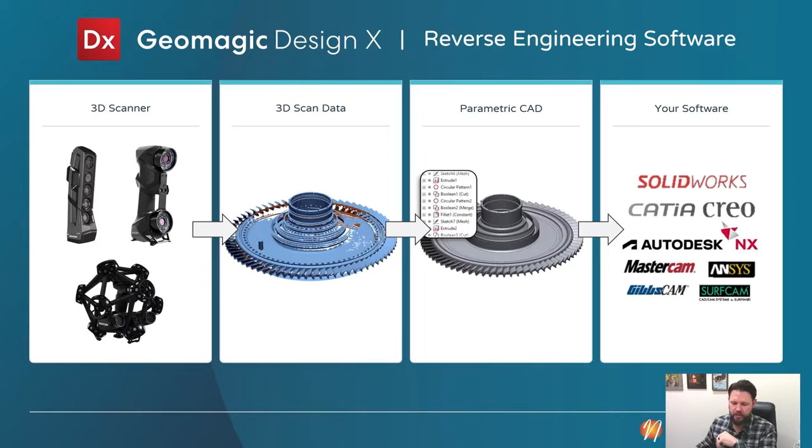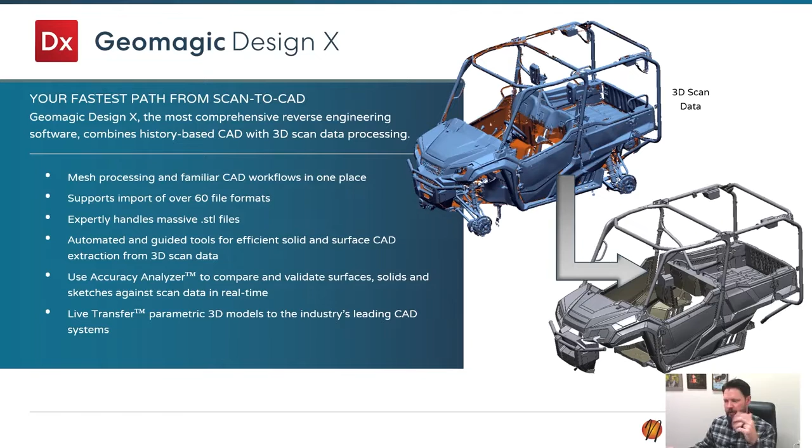A few other nice points about Design X. So we've got automated and guided tool sets, which you'll see here in a video in just a moment. At any point along the way, we can check our CAD accuracy to our scan with the accuracy analyzer, so you can make sure that your CAD file is going to be as accurate as possible. And then once you're all wrapped up, we can do the live transfer tree to your favorite CAD program. Let's say you're using SolidWorks or something like that.

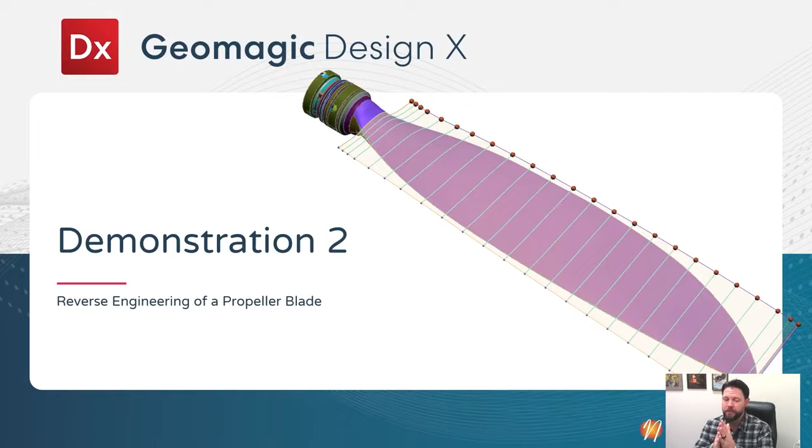So for the second video presentation, this one's a little longer, but it shows a lot of the different tools that I use on a daily basis that are my favorites, and the reason that Design X really pulls ahead of everyone. All right, so as we launch this here, make sure this is going. There we go. Okay. So the way that Design X works is it breaks the mesh into these regions here with the auto segment tool.

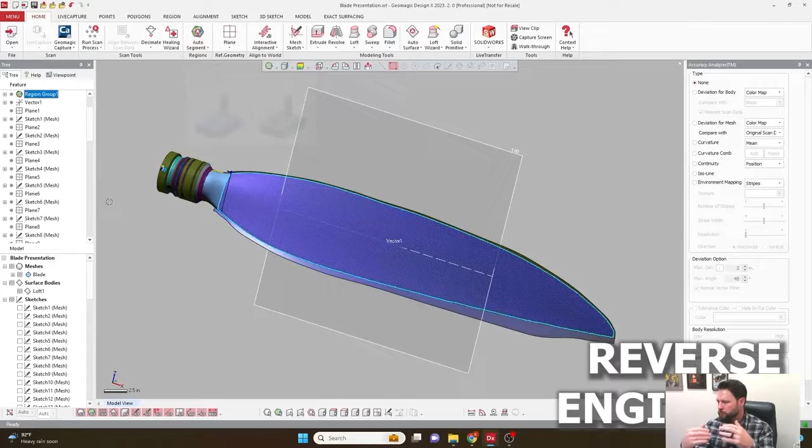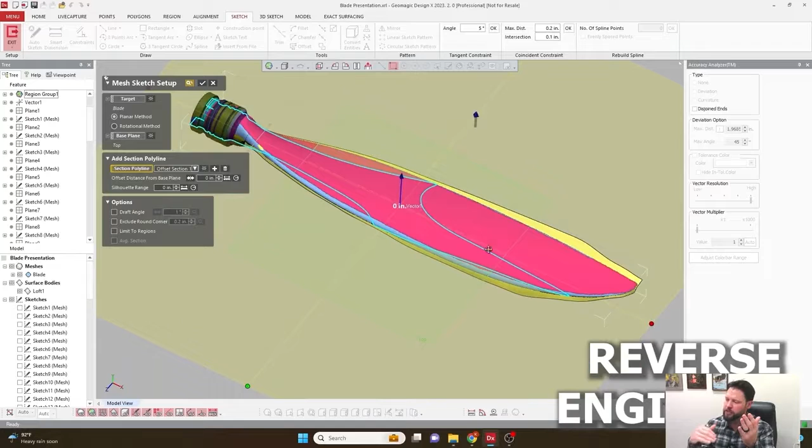And these regions are essentially areas on the mesh that the software recognizes as common geometry. So we've got freeforms, we've got cylinders, planes. Now it's not geometry, it's just areas on the mesh that the software recognizes. Those let us do our automated solutions. Behind those automated solutions is this very basic tool, the mesh sketch. Now I say basic, but it's very powerful because it allows you to create a sketch and cut a cross section to trace for each sketch that you do.

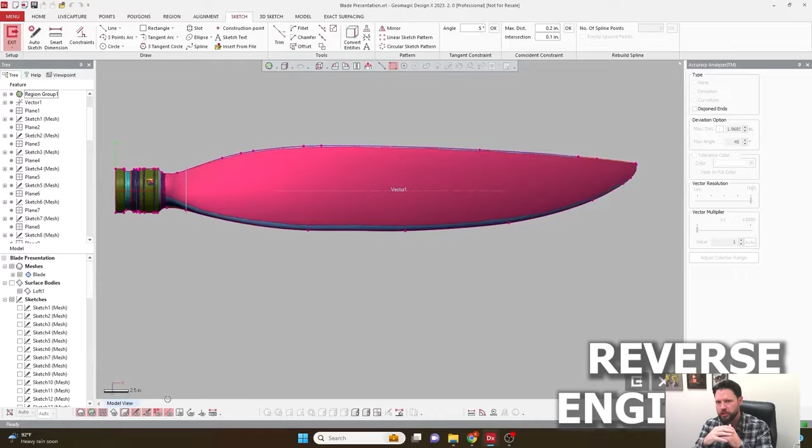Because we can't get a 2D cross section on this 3D profile blade, and I want to get the full profile, I can expand what's called a silhouette range, which is fairly unique for Geomagic. And what that does is it projects the whole profile of that blade to my sketch plane. Now what we're looking at here is basically a 2D version of those 3D regions that you saw, all the different colors, and it segments this cross section up into what it thinks are common areas. And what you can utilize that for is putting geometry on those areas.

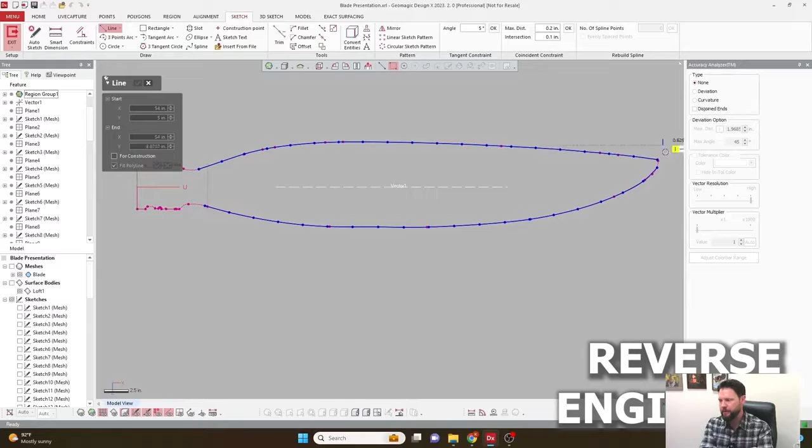So here what I've done is I've laid an actual spline across that because it's more of a spline function there. I've laid a spline across that whole line, and at that point it's going to convert it to real geometry. So we can utilize any of our general sketch tools if we want to in here. We can trim up this whole area because I want a full bounded area. Because what I'm looking for is a solid body that I could extrude that is the exact outer profile of that blade. All right, so we can pull these nodes along that.

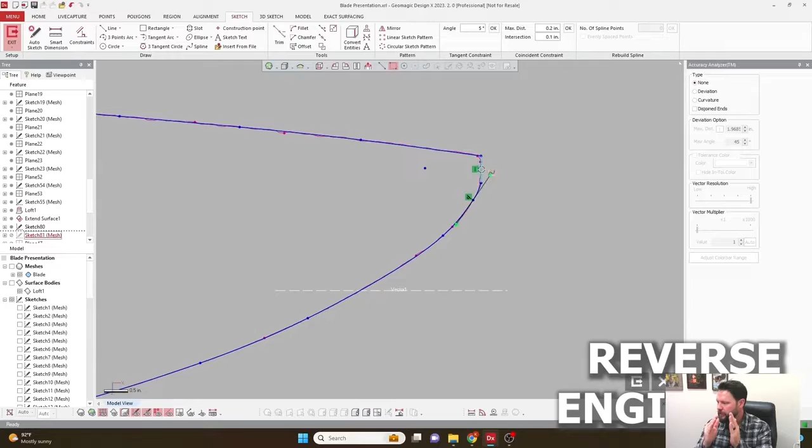You see everything snaps to that reference polyline, so we can snap everything up to it and make sure we're all nice and accurate. Make everything tangent, and that way we have a really nice blade profile.

So what I'm going to do is take that sketch, which at this point is just a regular sketch, just like you would do in any other program. We're going to extrude that one way and then the other, and you can see there we get our solid body.

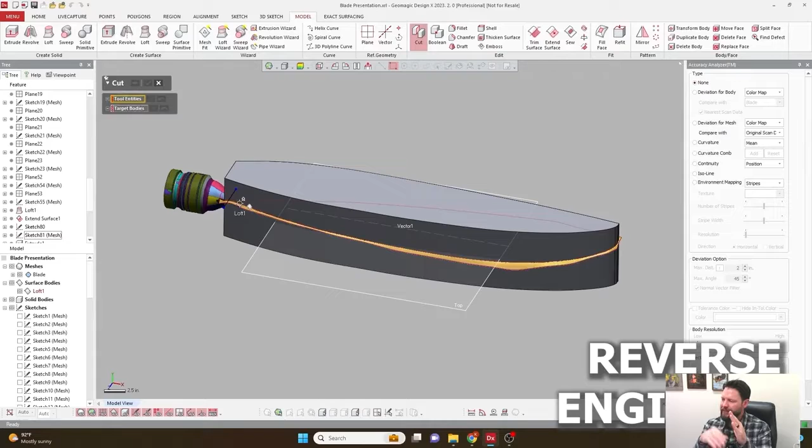Now the next step is to cut. I've already done a surface in this file for one side of the blade. We're going to show how that works in just a second, how I create that. But we're going to use that surface to cut that blade off.

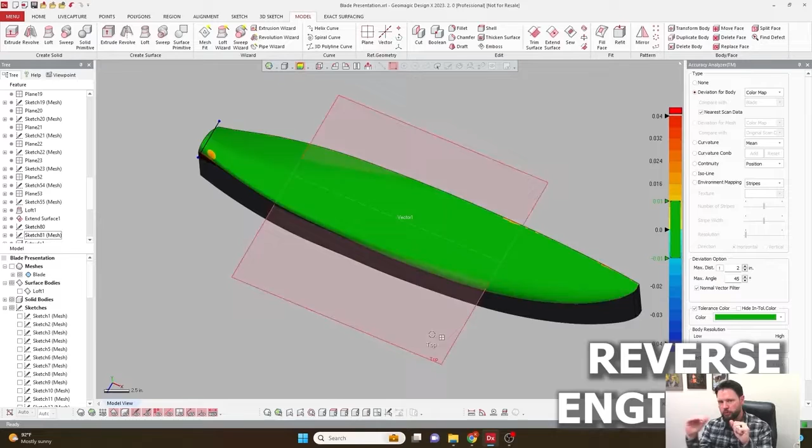Now here's the accuracy analyzer. You can see here, we can put in any specific tolerance we want on the right side, and it'll show us a green color map, showing any areas like that little red area that's flagged, saying this is out. For this demonstration, I'm happy with that, but we'll show how you tune all that deviation out in just a moment.

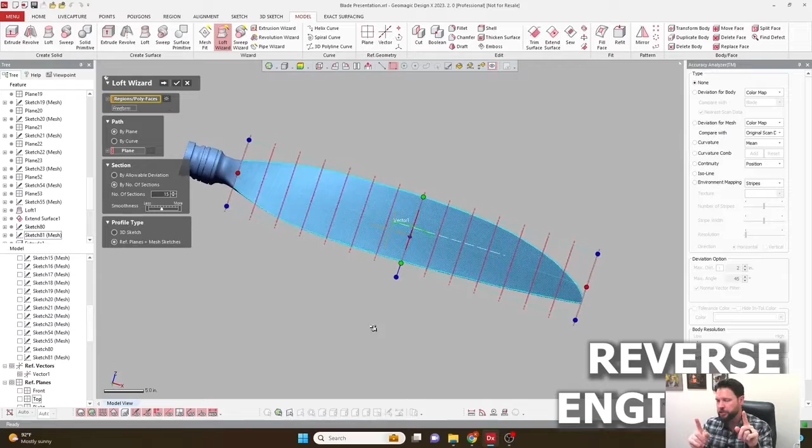The Loft Wizard is the tool we're going to use for this. With the Loft Wizard, you utilize that region, the one we broke up at the beginning, and we decide how many segments we want in that region. I already know because I've done this, but you need 15 segments because this is a fairly complicated shape, not super wavy, but it changes a lot from tip to base.

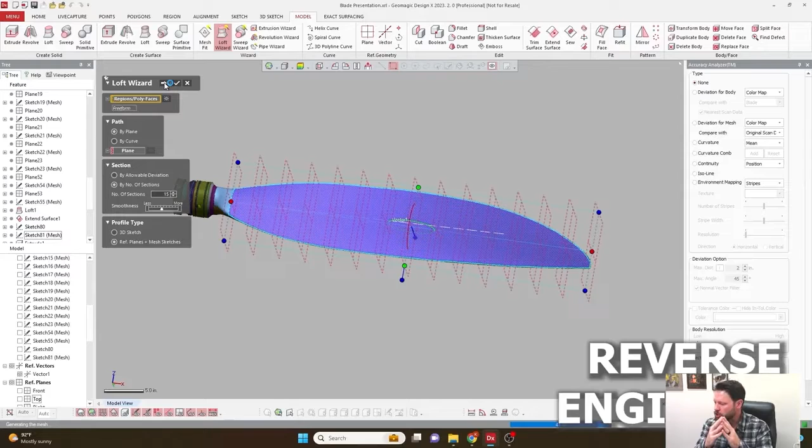So what we're going to do is tell it to put a number of sections in there. I always start lower than I think I need, and then I'll adjust from there.

Okay, so you can see here it's taken that and cut a cross section on that mesh all the way down that blade. And when I turn on Accuracy Analyzer, that gives us a live view of how accurate our CAD surface is to the underlying scan.

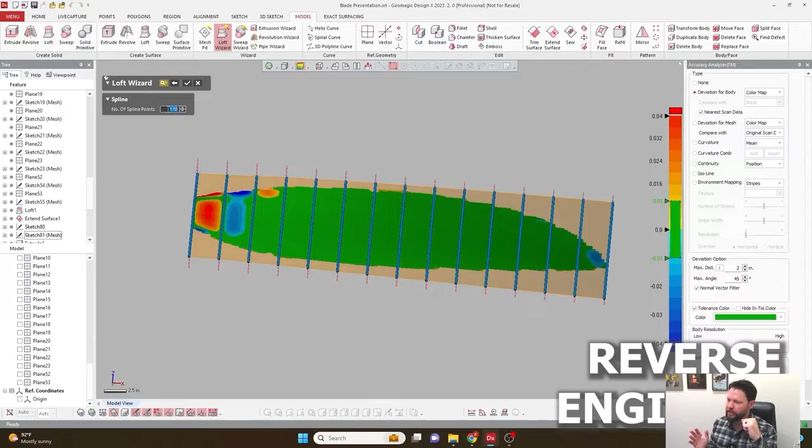We got a few areas there that we need to get rid of, and you can adjust. Right here I'm adjusting the number of spline points because it was just way too dense. Each of those segments was pretty dense.

You get those down as far as you can, and then now you can drag and drop those cross sections and tune that deviation out. So pretty nice, it's all interactive.

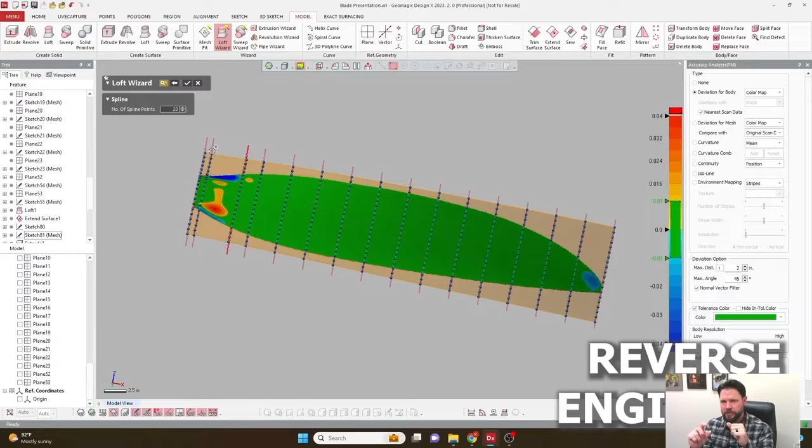So with that Accuracy Analyzer paired with the Loft Wizard, we can accomplish the hardest part of the loft, which is determining where we need those segments to be, because you can really chase your tail if you don't have this option. Putting one segment in one spot, as you can see, may cause a teeter-totter effect that throws out another one.

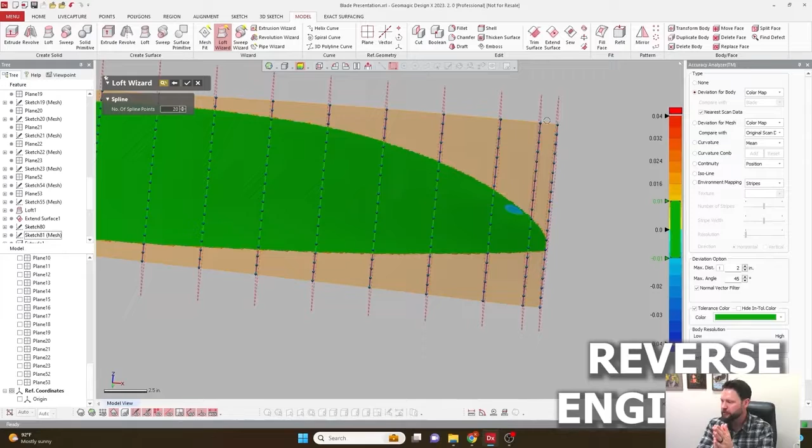So this really lets you play around and get your most efficient loft without having too many segments in there. The more segments you get, the more possibility you have of getting ripples and things like that in your surface.

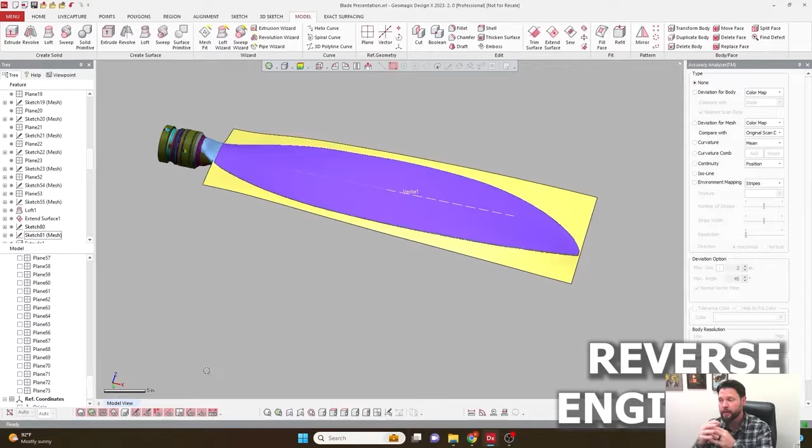But this tool alone is just, this is what makes Design X my go-to, because when I do reverse engineering projects, it's because I have geometry like this that I have to deal with. And this tool accomplishes the job. It's not even close, the fastest out of everything else.

So we can use that new surface to cut that extruded body just like we did the last one, and you can see there what we're left with is our blade profile.

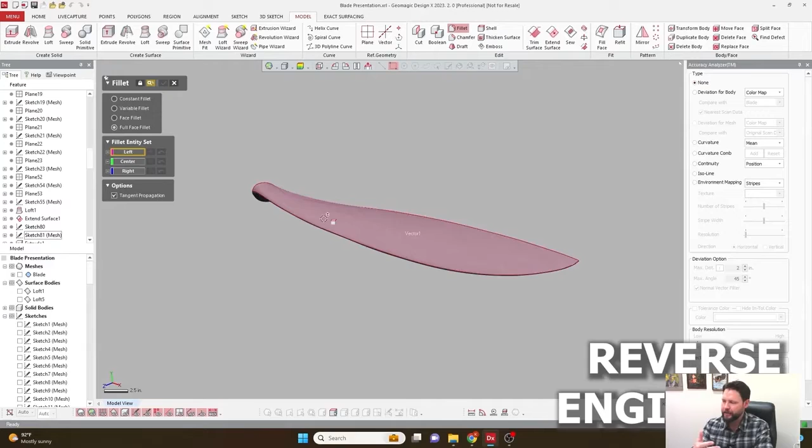So I'm going to use a standard tool you'd find in anything else to round that front leading edge, because those edges on an airfoil need to be rounded. We're going to use a full face fillet, and you can see there it puts a nice round all the way around that profile at the limit that we sketched it, so that way we make sure our fillet is not pulling that edge in or out.

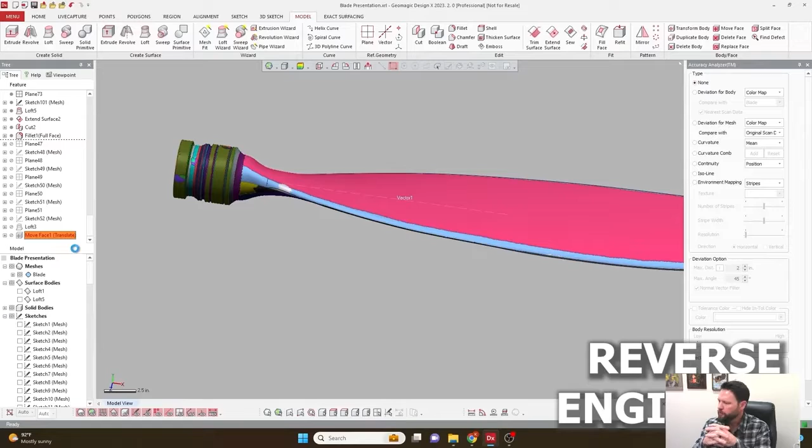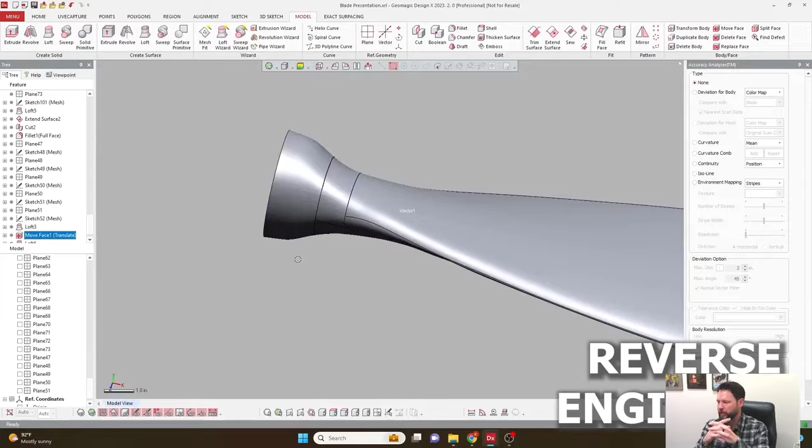From there, I'll roll through. I have a few things already done, but I did another loft to make the base of that root, basically the base of the blade that's going to interface with the hub. I use a standard loft tool, making sure my faces are tangent to get the blade to the root. That's a very efficient way to get that. I try to close that gap up as much as possible, so the software doesn't have to do anything crazy. You can always sketch in guide curves and things like that as well, to make sure you have a very nice transition from the blade to the root.

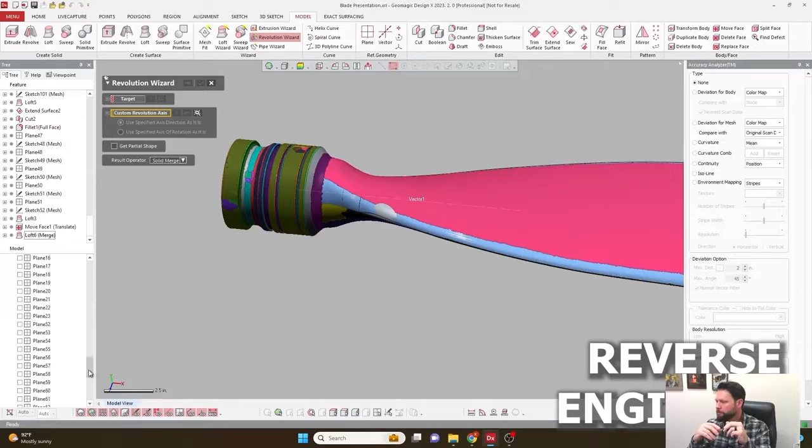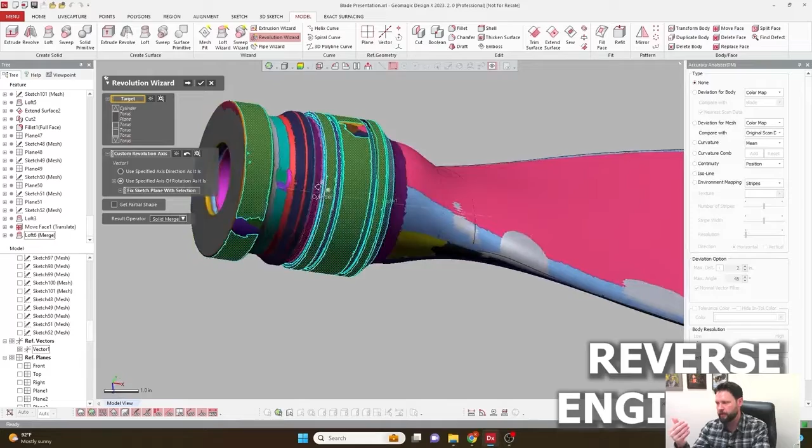The last thing I want to show: along with the Loft Wizard, we have a Sweep Wizard, Mesh Fit Wizard, Extrusion, Revolution, and Pipe Wizard, plus a couple others not shown in the main toolbar. The Revolution Wizard is really cool because we can choose the center axis of our hub, and then click and select basically the regions that make up the profile of this revolve for the hub. The software is going to create, just like with the blade, an automatic geometry solution for us.

So what I'm doing is selecting all the regions. Basically, if I were to cut a cross section through this hub, I'm going to get that whole profile. Then when I go to the next stage, it allows me to tweak those with sliders: the resolution, and whether or not I want the small fillets that it sees as sharp edges.

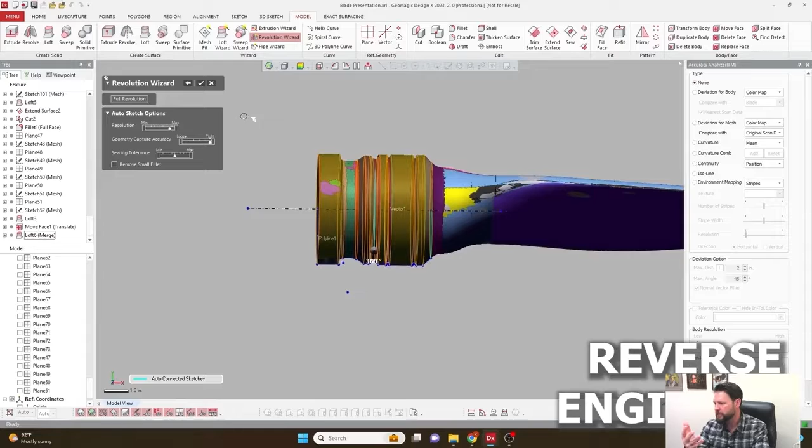I've got a few different options, and when I click my checkbox, what's really cool with any of these is that once I create my part, it doesn't just throw the part in there. Just like with the surface, it creates a sketch, you can see over here in the tree, and it creates the revolve. So we have a parametric feature from an automatically created geometry.

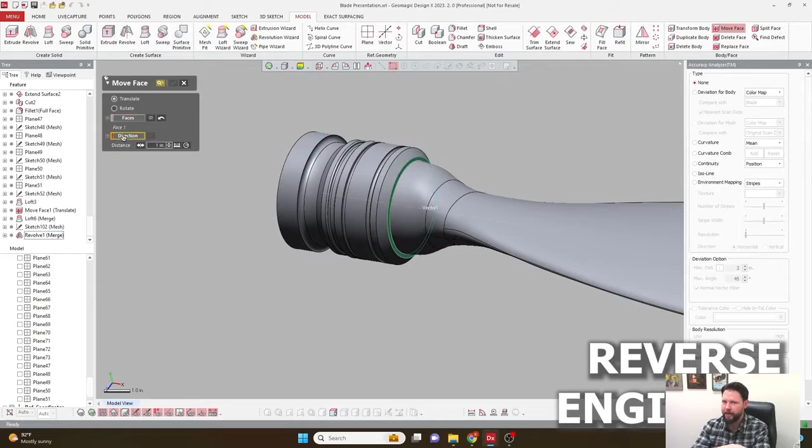You can always go back and edit it afterwards. So if it doesn't give you exactly what you want, being it was automatic, you can edit it from there.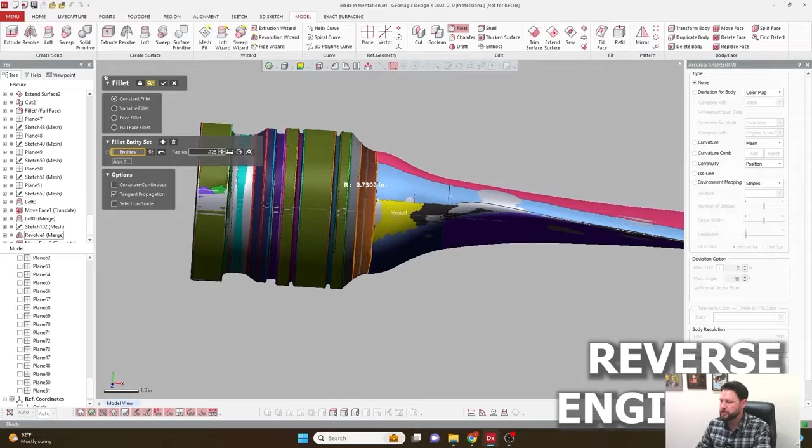I put a fillet between the revolved hub and the root of the blade, just so we don't have any sort of stress concentration there. With the fillet tool, we have an automatic radius button that'll find the radius, and then you can fine tune it from there and make it more of a standard value. That wraps up the model of the blade. Everything you just saw there was the whole model of that blade.

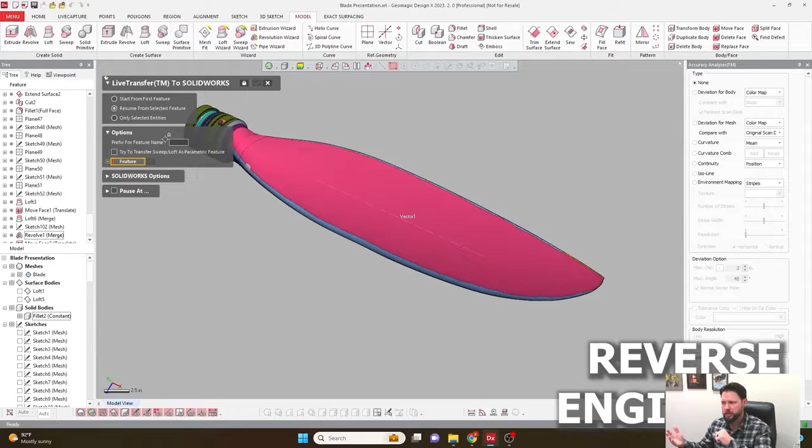Once we get done, we can check the accuracy analyzer, make sure we're good to go. Then we can transfer this entire tree over to SolidWorks. That's what I've got on my computer. You can do it to a number of different programs, but I've got SolidWorks, and it works the same way.

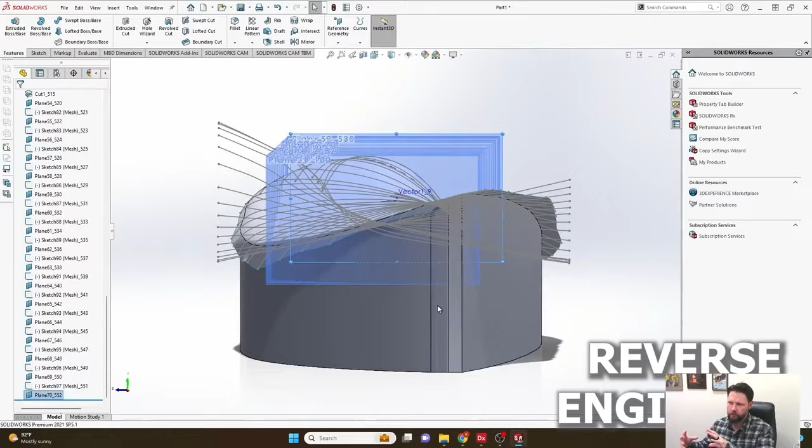I've sped this process up. It basically transfers this line by line, but in the video you can see all these segments coming in: the line segments, the extrudes, the loft, and this builds our model in SolidWorks. That way we can save it as a parametric SolidWorks model. Very cool.

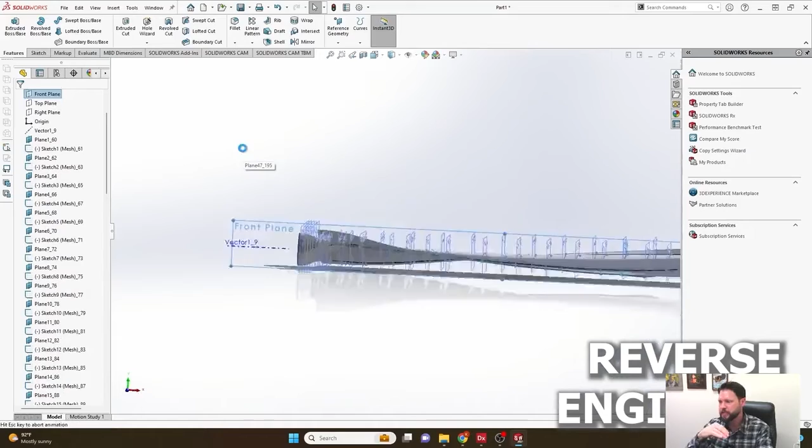If you've got a part catalog that needs that sort of thing, we can save it out as an IGES, STEP, or Parasolid and just have the solid body. But if your catalog requires that parametric list, we can get you that. If you've got an end customer that wants a full parametric SolidWorks file, same thing, we can deliver one.

So there we are. That's the model, just like what we got over in Design X. And that's the full start to finish Geomagic Design X workflow. So, awesome software.